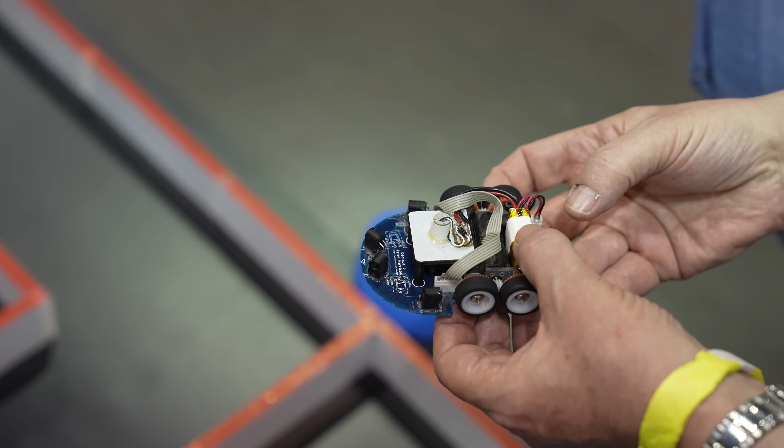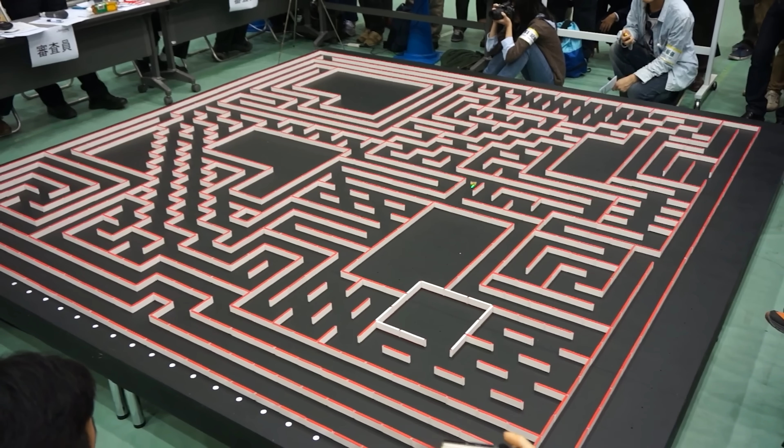This tiny robot mouse can finish this maze in just 6 seconds. Every year around the world, people compete in the oldest robotics race. The goal is simple: get to the end of the maze as fast as possible. The person who came second lost by 20 milliseconds. But competition has grown fierce.

When somebody saw my design, they said, "You're crazy!" Why is there so much tension? What's riding on it? Honor? Honor?

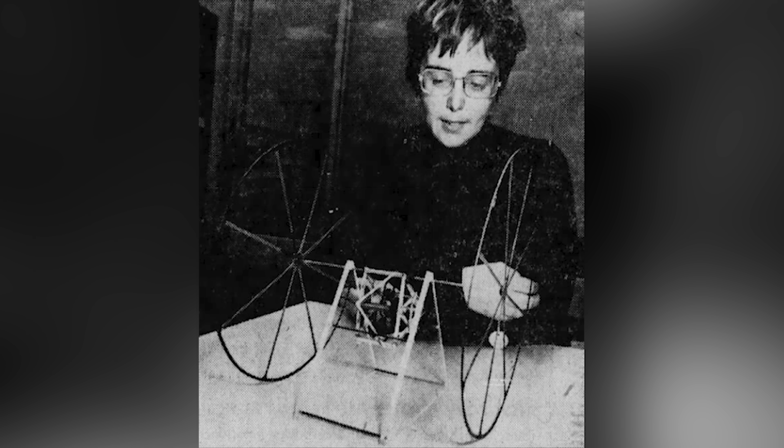25 years later, editors at the Institute of Electrical and Electronics Engineers, or IEEE, caught wind of a contest for electronic mice, or La Mouse Electronique, as they had heard. They were ecstatic. Were these the successors to Theseus? But something had been lost in translation. These mice were just batteries in cases, not robots capable of intelligent behavior. But the misunderstanding stuck with them, and they wondered, why couldn't we hold that competition ourselves?

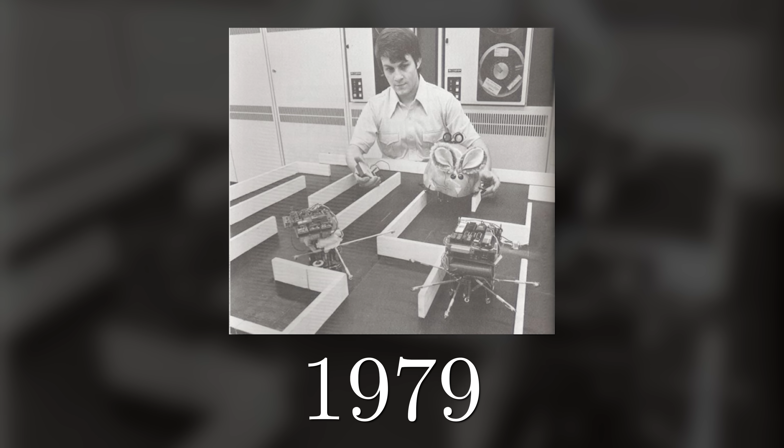In 1977, the announcement for IEEE's Amazing Micromouse Maze contest attracted over 6,000 entrants. But the number of successful competitors dwindled rapidly. Eventually, just 15 entrants reached the finals in 1979. But by this point, the contest had garnered enough public interest to be broadcast nationwide on the evening news. And just like the rumor that inspired the competition, Micromouse began to spread across the world.

Micromouse is for the taking. Micromouse is here and now. Take a chance and start creating.

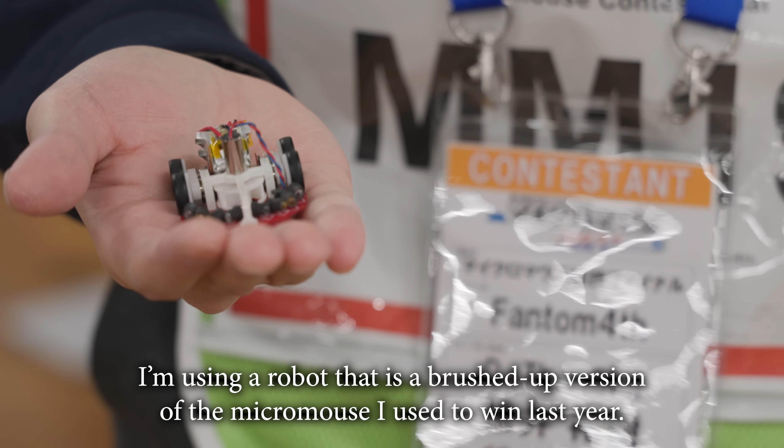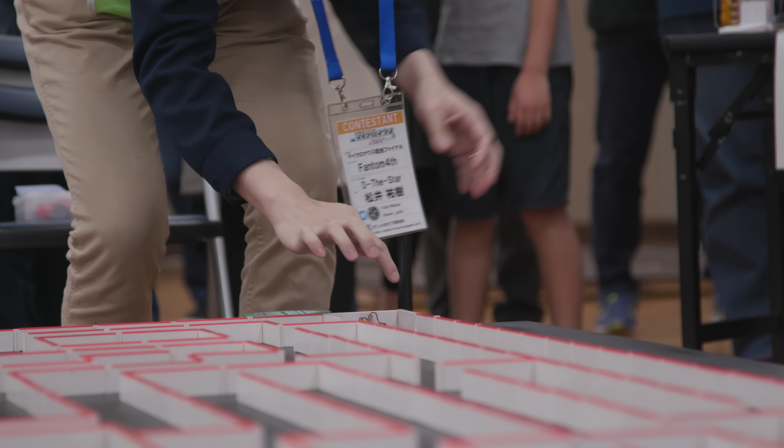Even people in the top 2 or 3, you can see them trying to set their mice up and they can barely find the buttons to press because it's absolutely nerve-wracking. It doesn't matter what it was. It could be horse racing, it could be motor racing, it could be mouse racing. If you have a shred of competitiveness in you, you want to win, right?

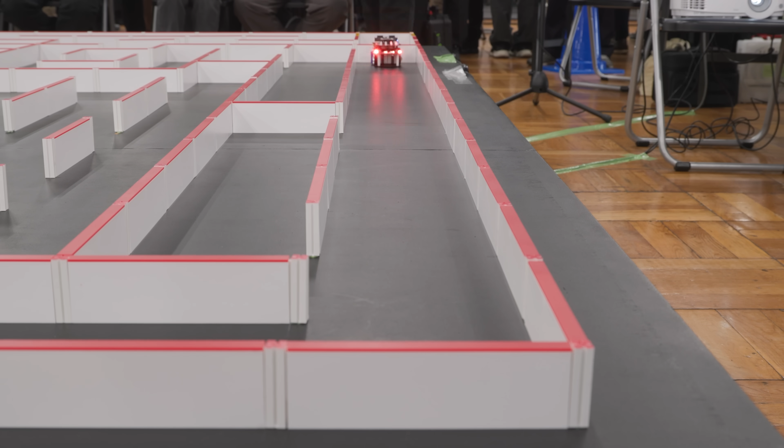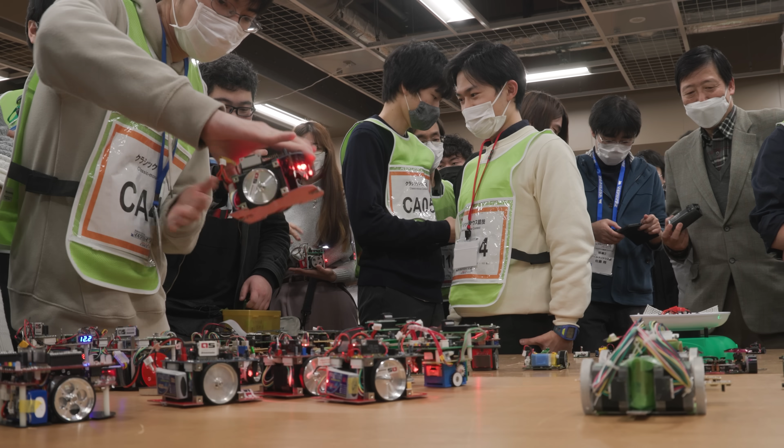Just like a real mouse, a micromouse has to be fully autonomous. No internet connection, no GPS or remote control, and no nudging it to help it get unstuck. It has to fit all its computing, motors, sensors, and power supply in a frame no longer or wider than 25 centimeters. There isn't a limit on the height of the mouse, but the rules don't allow climbing, flight, or any forms of combustion. So rocket propulsion, for example, is out of the equation.

The maze itself is a square about 3 meters on each side, subdivided by walls into corridors only 18 centimeters across. And in 2009, the half-size Micromouse category was introduced, with mice smaller than 12.5 centimeters per side and paths just 9 centimeters across. The final layout of the maze is only revealed at the start of each competition, after which competitors are not allowed to change the code in their mice.

The big three competitions, All Japan, Taiwan, and USA's APEC, usually limit the time mice get in the maze to 7 or 10 minutes, and mice are only allowed 5 runs from the start to the goal. So if you spend a lot of time searching, that's a penalty. Makes sense. So the strategy for most micromice is to spend their first run carefully learning the maze and looking for the best path to the goal, while not wasting too much time. Then they use their remaining tries to sprint down that path for the fastest runtime possible.

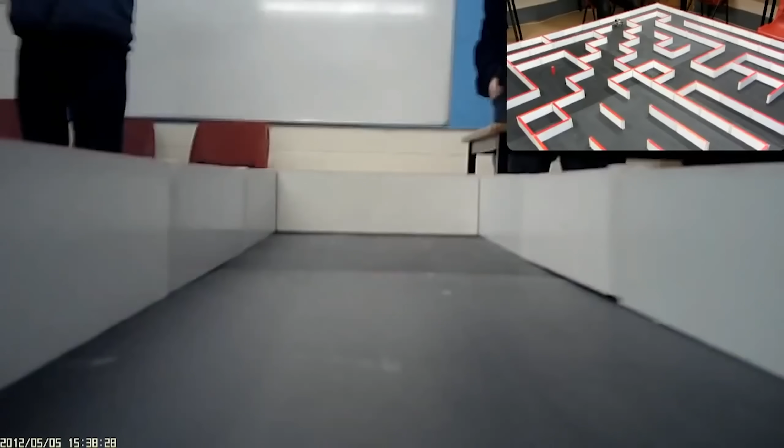Solving a maze may sound simple enough, though it's important to remember that with only a few infrared sensors for eyes, the view from inside the maze is a lot less clear than what we see from above. Still, you can solve a maze with your eyes closed. If you just put one hand along one wall, you will eventually reach the end of most common mazes.

And that's exactly what some initial Micromouse competitors realized too. And after a simple wall-following mouse took home gold in the first finals, the goal of the maze was moved away from the edges and freestanding walls were added, which would leave a simple wall-following mouse searching forever.

Your next instinct might be to run through the maze taking note of every fork in the road. Whenever you reach a dead end or a loop, you can go back to the last intersection and try a different path. If your last left turn got you nowhere, you'd come back to that intersection and go right instead. You can think of this strategy as the one a headstrong mouse might use, running as deep into the maze as it can and turning back only when it can't go any further.

This search strategy, known as depth-first search, will eventually get the mouse to the goal. The problem is, it might not be the shortest route, because the mouse only turns back when it needs to, so it may have missed a shortcut that it never tried. The sibling to this search algorithm, breadth-first search, would find the shortest path.

With this strategy, the mouse runs down one branch of an intersection until it reaches the next one, and then it goes back to check the path it skipped before moving on to the next layer of intersections. So the mouse checks every option it reaches, but all that backtracking means that it's rerunning paths dozens of times. At this point, even searching the whole maze often takes less time. So why not just do that?

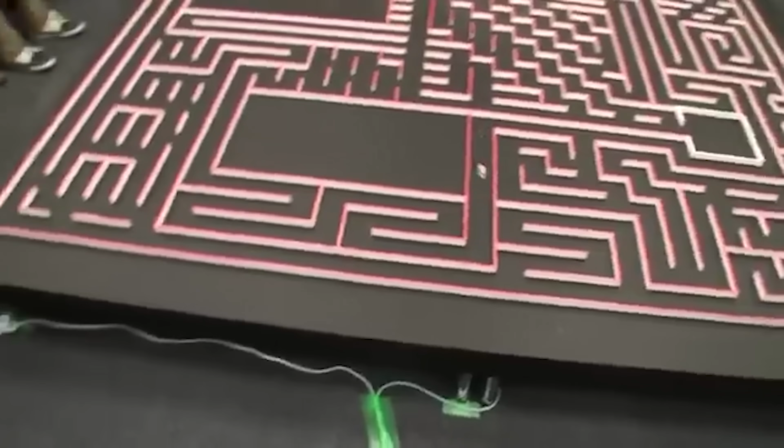Once there was a clear strategy to find the shortest path, and once the microcontrollers and sensors required to implement it became common, some people believed Micromouse had run its course. As a paper published in IEEE put it, at the end of the 1980s, the Micromouse contest had outlived itself. The problem was solved and did not provide any new challenges.

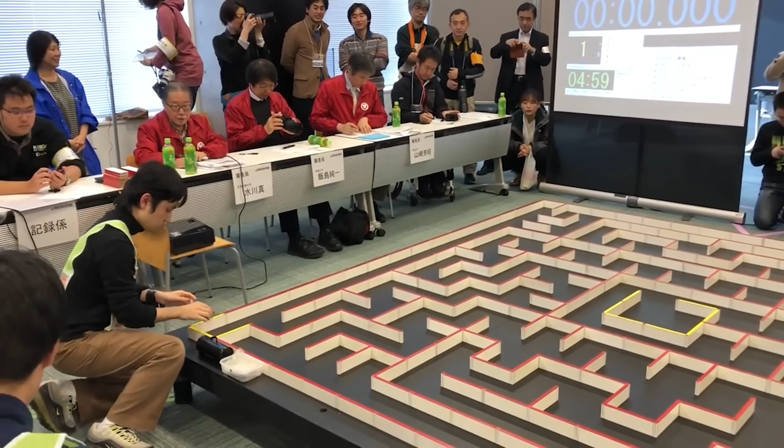In the 2017 All Japan Micromouse competition, both the bronze and silver placing mice found the shortest path to the goal, and once they did, they were able to zip along it as quick as 7.4 seconds. But Masakazu Utsunomiya's winning mouse, Red Comet, did something entirely different. This is the shortest path to the goal, the one that everyone took. This is the path that Red Comet took. It's a full 5.5 meters longer.

That's because Micromice aren't actually searching for the shortest path, they're searching for the fastest path. And Red Comet's search algorithm figured out that this path had fewer turns to slow it down. So even though the path was longer, it could end up being faster. So it took that risk. It won by 131 milliseconds.

Differing routes at competition are now more common than not, and even just getting to the goal remains difficult, whether due to a mysterious algorithm or a quirk of the physical maze. The corner, it's a little bit like a whoa. Micromice don't always behave as you'd expect.

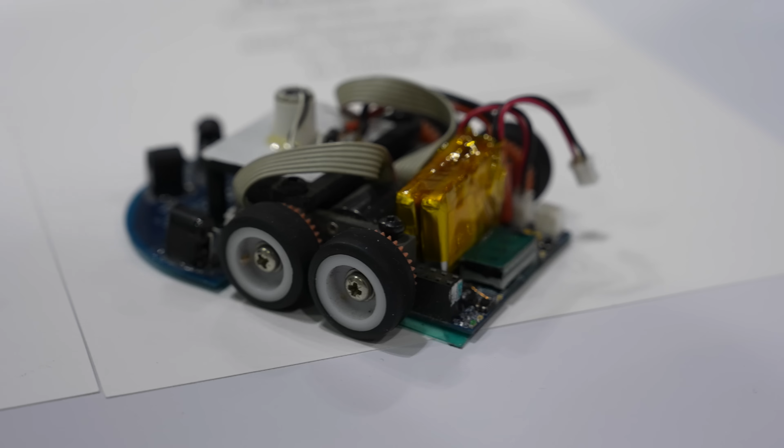Micromouse is far from solved, because it's not just a software problem or a hardware problem, it's both. It's a robotics problem. Red Comet didn't win because it had a better search algorithm or because it had faster motors. Its cleverness came from how the brains and body of the mouse interacted together. So it turns out solving the maze is not the problem, right? It never was the problem, right? But it's actually about navigation, and it's about going fast.

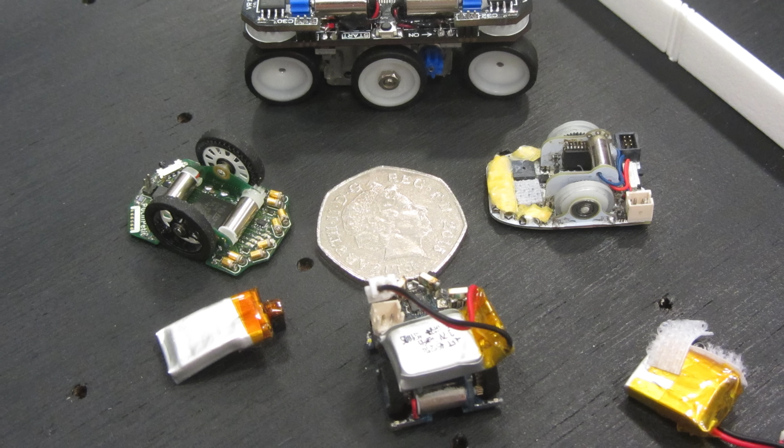Every year, the robots get smaller, faster, lighter. There is still plenty of innovation left. And there's a small group of devotees in Japan busy building quarter-sized Micromouse, which would sit on a quarter. Nearly 50 years on, Micromouse is bigger than ever.

Competitions have appeared solved at first glance before. The high jump was an Olympic sport since 1896, with competitors refining their jumps using variations like the scissor, the western roll, and the straddle over the decades, with diminishing returns. But once foam padding became standard in competition, Dick Fosbury rewrote the sport in 1968 by becoming the first Olympian to jump over the bar backwards. Now almost every high jumper does what's known as the Fosbury flop.

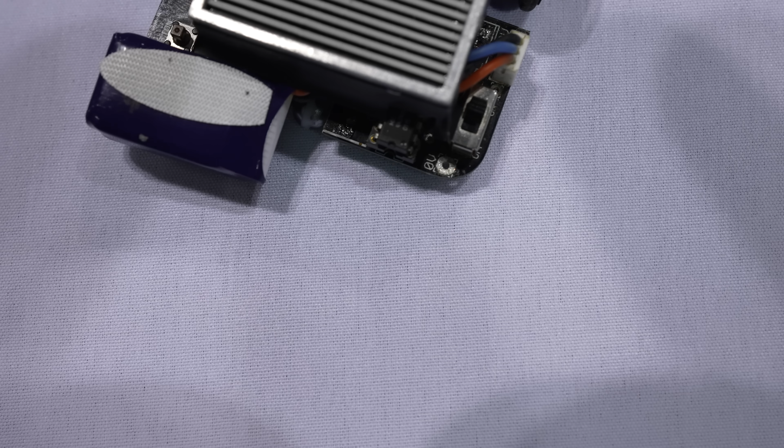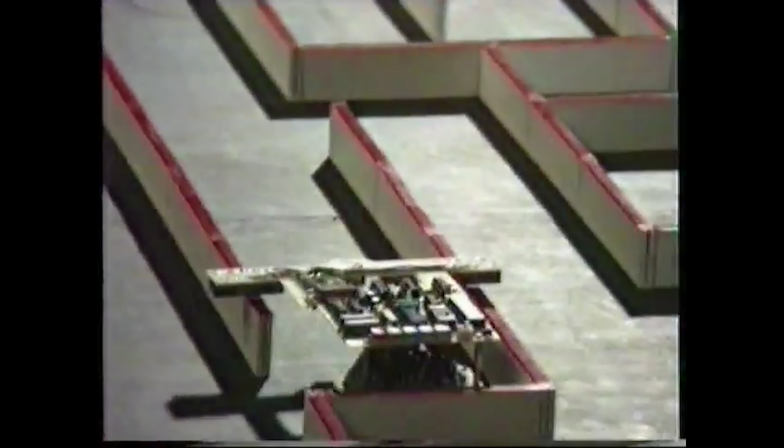If Micromouse had indeed stopped in the 1980s, the competition would have missed its own Fosbury flops, two innovations that completely changed how Micromice ran. After all, a lot can change in a sport where competitors can solder on any upgrade they can imagine. The first Fosbury flop was one of the earliest innovations in Micromouse, and had nothing to do with technology. It was simply a way of thinking outside the box, or rather, cutting through the box.

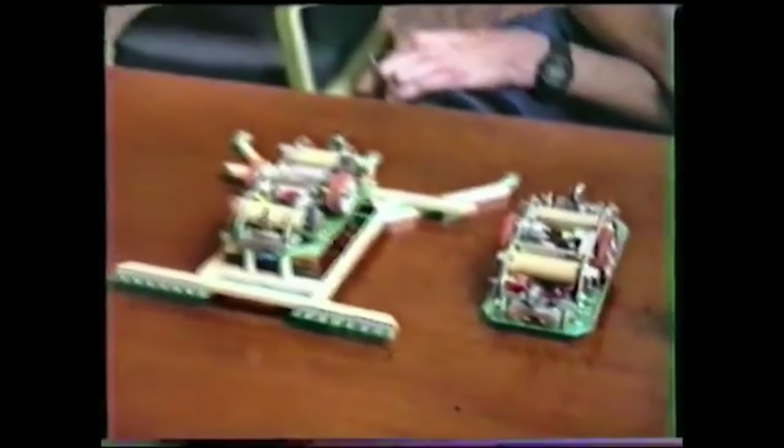Every mouse used to turn corners like this. But everything changed with Mitee Mouse 3. So Mitee Mouse 3 implemented diagonals for the first time. Oh, you're sneaking down here. And that turned out to be a much better idea than we really thought. And because it's cool, maze designers often put diagonals into the maze now. So you could end up with a maze where it never comes up, but most of the time it's actually a benefit.

In order to pull off diagonals, the chassis of the mouse had to be reduced to less than 11 centimeters wide, or just 5 centimeters for half-size Micromouse. The sensors and software of the mouse had to change too. When you're running between parallel walls, all you have to do is maintain an equal distance between your left and right infrared readings. But a diagonal requires an entirely new algorithm, one that essentially guides the mouse as if it had blinders on.

Normally, if you're going along the side of a wall or something like that, most of the time you can see the wall all the time. And so that helps you to guide yourself, and you know when you're getting off. But in the diagonal situation, you just see these walls coming at you. And if you veer even a tiny bit off course, snagging a corner is a lot less forgiving than sliding against a wall. Diagonals are still one of the biggest sources of crashes in competition today. But in exchange, a jagged path of turns transforms into one narrow straightaway.

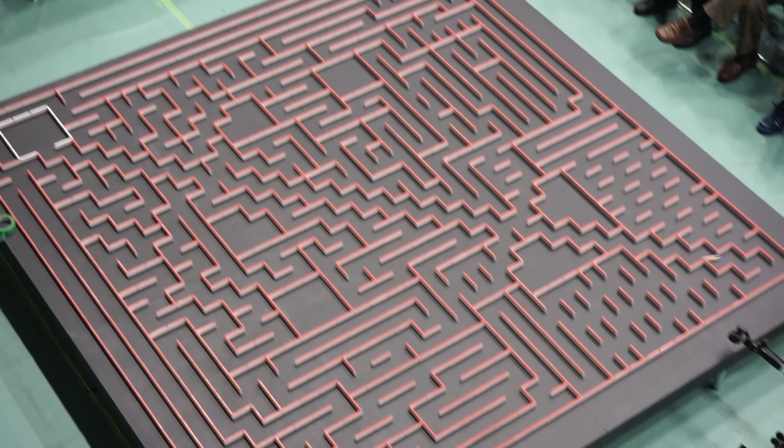These days, nearly every competitive Micromouse is designed to take this risk. Cutting diagonals opened up room for even more ideas. Around the same time, mice were applying similar strategies to turning. Instead of stopping and pivoting through 2 right turns, a mouse could sweep around in a single U-turn motion. And once the possibility of diagonals were added, the total number of possible turns opened up exponentially.

The maze was no longer just a grid of square hallways. With so many more options to weigh, figuring out the best path became more complex than ever. But the payoff was dramatic. What was once a series of stops and starts could now be a single fluid snaking motion. How Micromice imagined and moved through the maze had changed completely.

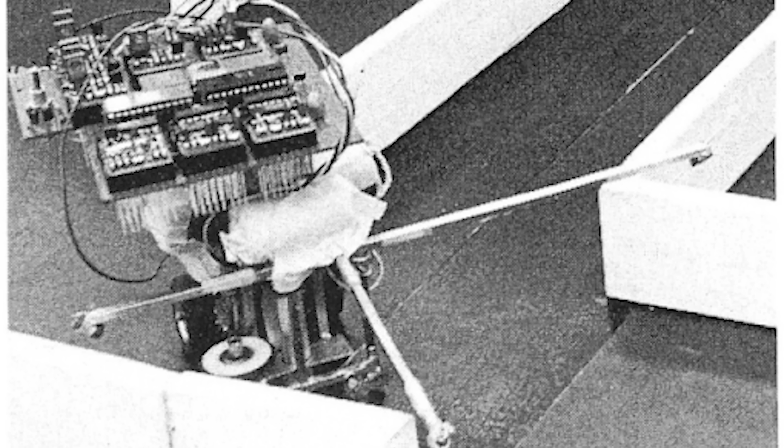Available technology was getting upgrades over the years as well. Tall and unwieldy arms that were used to find walls were replaced by a smaller array of infrared sensors on board the mouse. Precise stepper motors were traded in for continuous DC motors and encoders. The DC motors give you more power for less size and weight, and so we were interested in doing that. So then you have to have a servo, you have to actually have feedback on the motor to make it do the right thing.

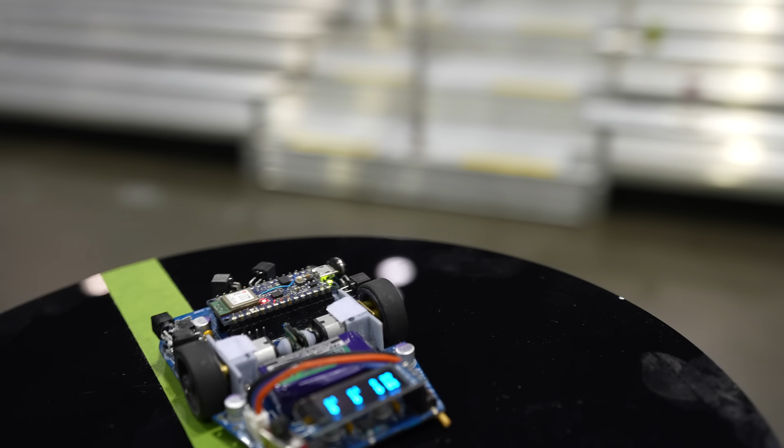Gyroscopes added an extra sense of orientation. It's like a compass. Yeah, absolutely. You had this thing with you. They came about because of mobile phones, really, so the technology provides people with things which weren't there before. All of the turning is done based off the gyro, rather than counting pulses off the wheels, because it's much more reliable. But even with all the mechanical upgrades, the biggest physical issue for Micromice went unaddressed for decades.

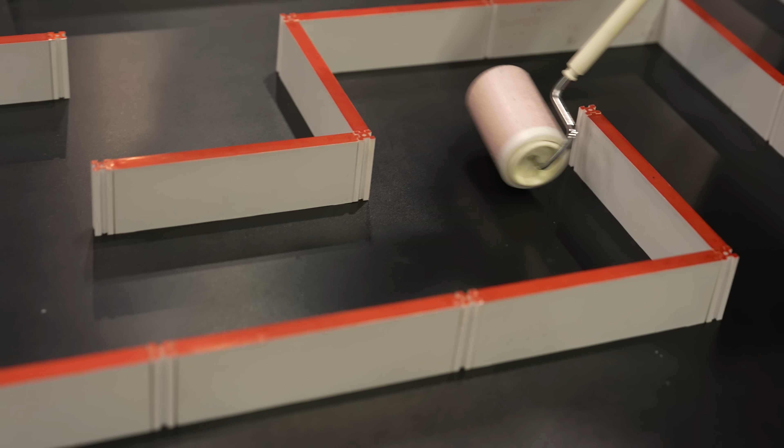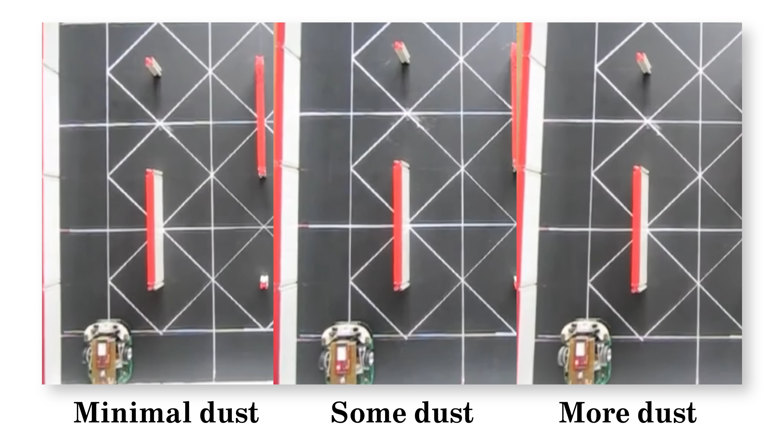One thing you'll see almost every competitor holding is a roll of tape. Once you know to look for it, you'll see it everywhere. This tape isn't for repairs or reattaching fallen parts, it's to gather specks of dust off the wheels in between rounds. At the speed and precision these robots are operating, that tiny change in friction is enough to ruin a run.

If you want to turn while driving fast, you need centripetal force to accelerate you into the turn. And the faster you're moving, the more force you need to keep you on the track. The only centripetal force for a car turning on flat ground is friction, which is determined by 2 things: the road pushing up the weight of the car, or the normal force, multiplied by the static coefficient of friction, which is the friction of the interface between the tire and road surface.

This is why racetracks have banked turns. The steep angles help cars turn with less friction, because part of the normal force itself now points in to contribute to the centripetal force required. If the banked turn is steep enough, cars can actually make the turn without any friction at all. The inward component of the normal force alone is enough to provide the centripetal force required to stay on track.

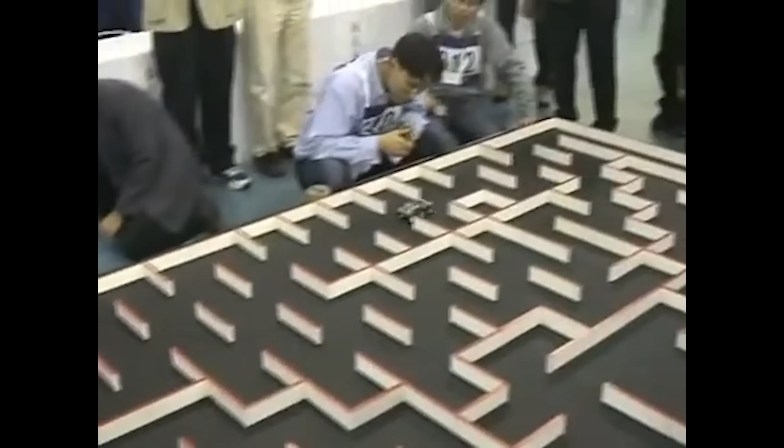Micromice are no different, and they don't have banked turns to help. As they got faster and faster, by the early 2000s, their limiting factor was no longer speed, but control of that speed. They had to set their center of gravity low and slow down during turns to avoid slipping into a wall or flipping over. But unlike race cars, there wasn't anything in the rules to stop Micromouse competitors from solving this problem by engineering an entirely new mechanism.

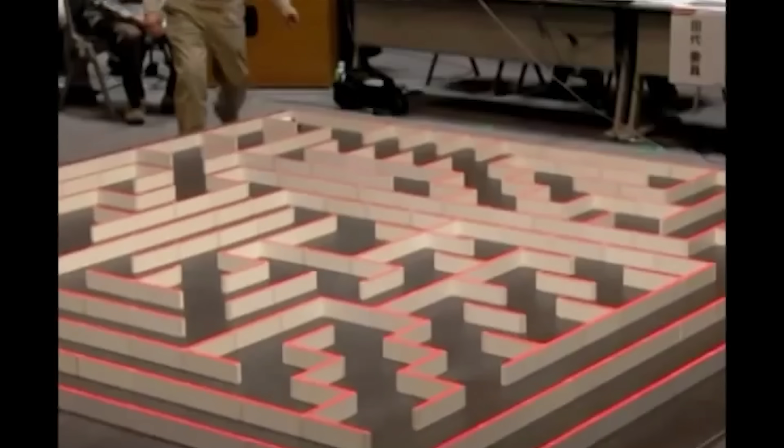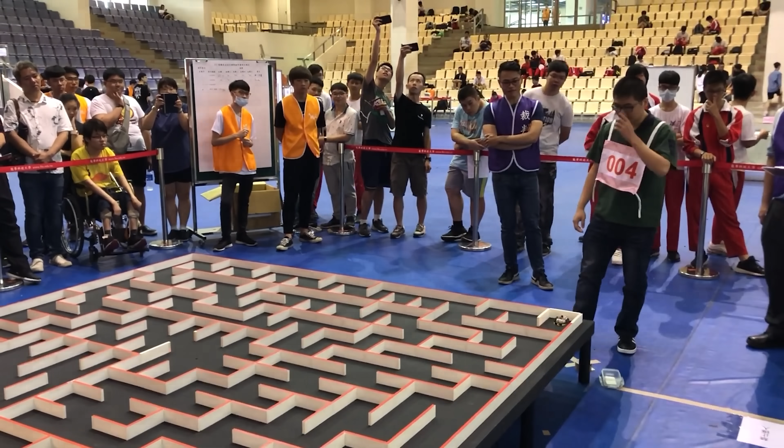Micromouse's second Fosbury flop was almost considered a gimmick when the mouse Mokomo 08 first used it in competition. You might be staring at the video to try to see it, but you won't. Instead, it's something you'll hear. That isn't the mouse revving its engines, it's spinning up a propeller. And while flying over the walls is against the rules, there's nothing in the rules against a mouse vacuuming itself to the ground to prevent slipping.

Dave Otten was the first person I saw put a fan on a mouse, but he used a ducted fan, and I think he was really looking at kind of reaction force, blowing the thing down. He had a skirt around, but it was not terribly effective. Forgive me for saying so.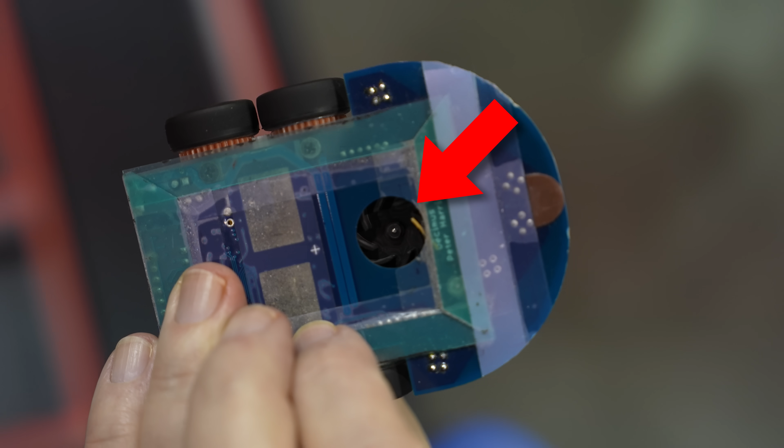The idea is to let as little air in as possible, and like your vacuum cleaner, when you block your vacuum cleaner, right, the motor unloads and speeds up, and so the current drops. But if you let too much air in, the current's very high, and these are just quadcopter motors, and they draw a lot of current.

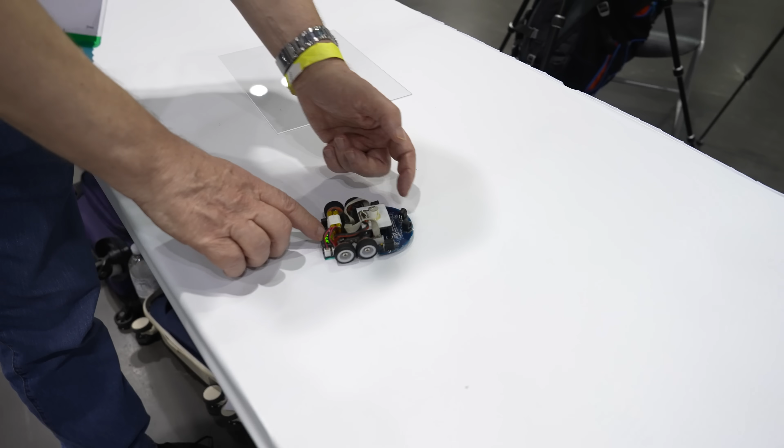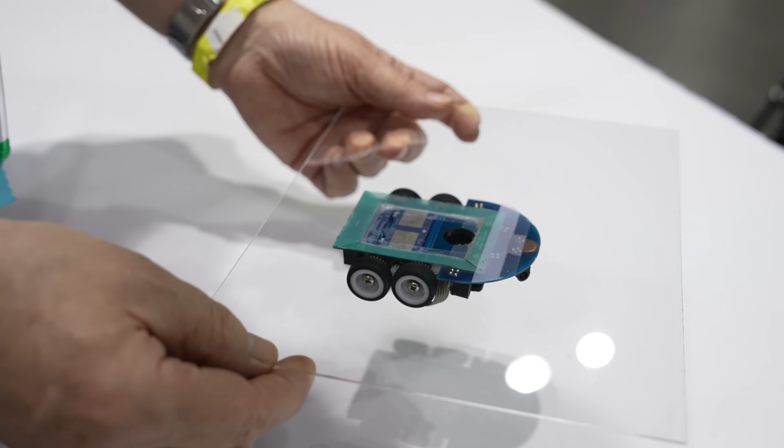At the scale of Micromouse, a vacuum fan, often just built from handheld drone parts, is enough to generate a downward force 5 times the mouse's weight. Wow, okay. That's impressive. So how much does the car actually weigh? About 130 grams. And if you listen, I don't know if you'll get it on your microphone, but oh yeah, you'll hear the motors slow down, it loads up.

With that much friction, Micromice today can turn corners with a centripetal acceleration approaching 6 Gs. That's the same as F1 cars. Once nearly everyone equipped fans, the added control allowed builders to push the speed limit on Micromice. When it's allowed to, it will out-accelerate a Tesla Roadster, but not for very far. And they can zip along at up to 7 meters per second, faster than most people can run.

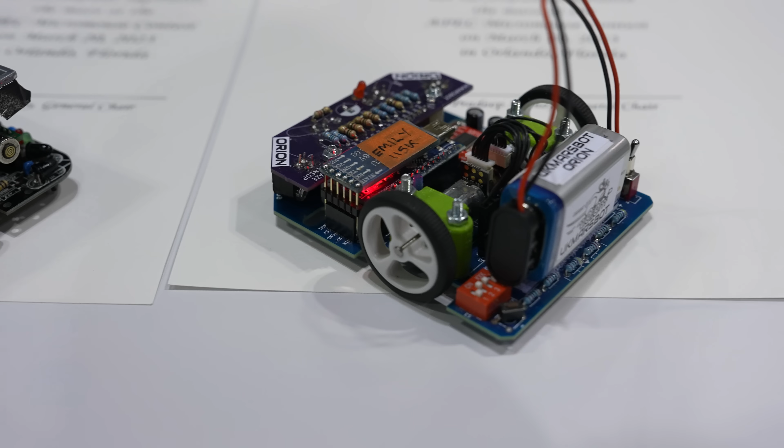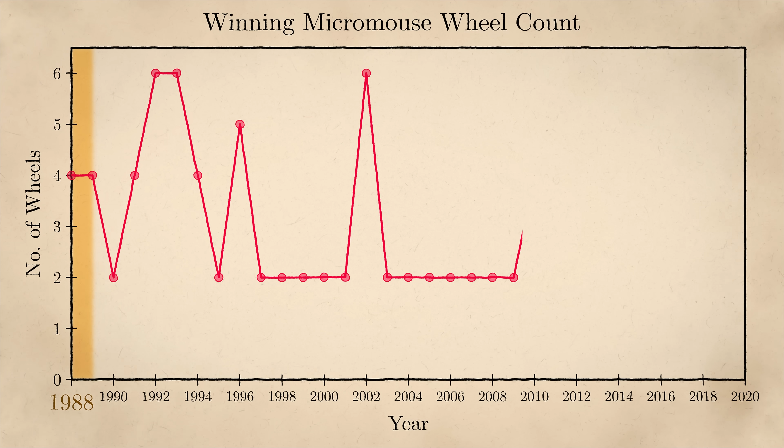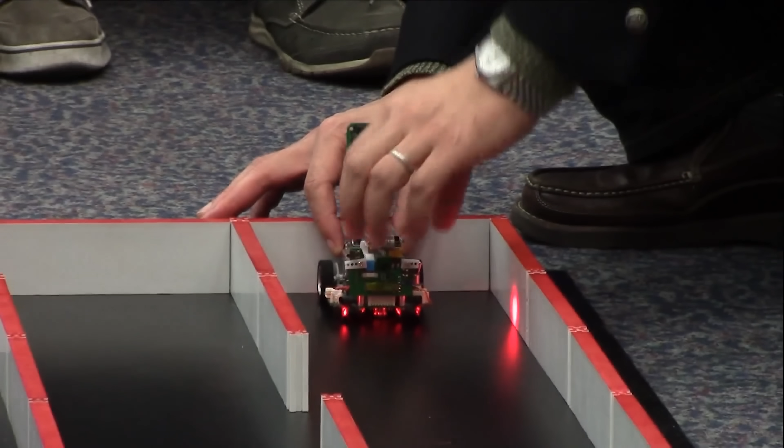Every one of the features now standard on the modern Micromouse was once an experiment, and the next Fosbury flop might not be far off. The first 4-wheeled Micromouse to win the All Japan competition did so in 1988, but it would take another 22 years of the winning mouse growing and losing appendages before 4-wheeled mice became the norm. With Micromice still experimenting in 6- and 8-wheeled designs, omnidirectional movement, and even computer vision, who knows what the next paradigm shift will be. Your time on the maze actually begins only when you leave the start square.

So he's not penalized for any of this time. But if you want to get started with Micromouse, you don't need to worry about wheel count or vacuum fans or even diagonals. It is, to my mind, the perfect combination of all the major disciplines that you need for robotics and engineering and programming, embedded systems, all wrapped up in one accessible bundle that you can do in your living room, and you don't need a laboratory to run it.

You come along because you're curious, and then you think, I could do that. That doesn't look so hard. And then you're doomed, really. If it sucks you in, it turns into quite a journey.

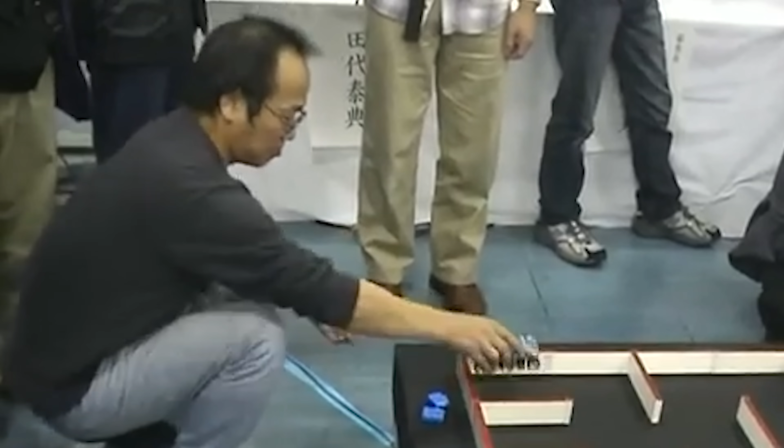At its core, Micromouse is just about a mouse trying to solve a maze. Though nearly 50 years later, it's a simple problem that's a good reminder there is no such thing as a simple problem.

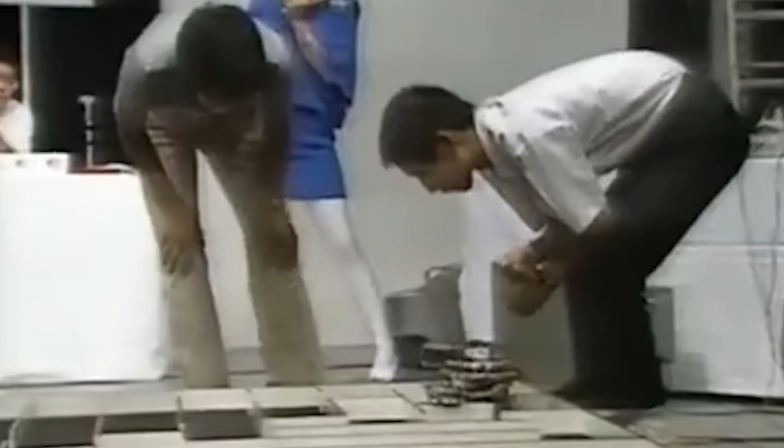Micromouse is here and now. Take a chance and start creating. Micromouse will show you how.